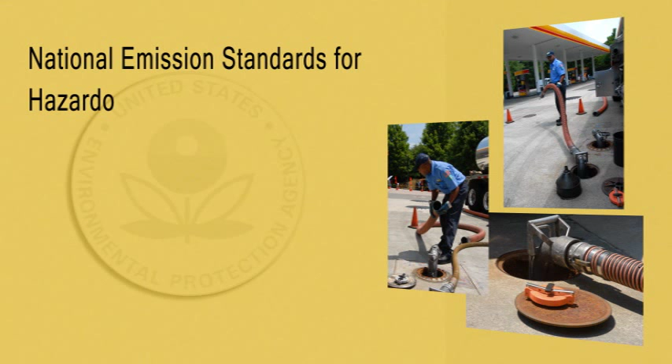The standard is required by the Clean Air Act and goes by a rather lengthy name: the National Emission Standards for Hazardous Air Pollutants for Source Category, Gasoline Dispensing Facilities Subpart CCCCCC. For ease, we will refer to it as NESHAP 6C. Please note that this is a federal, not a state rule.

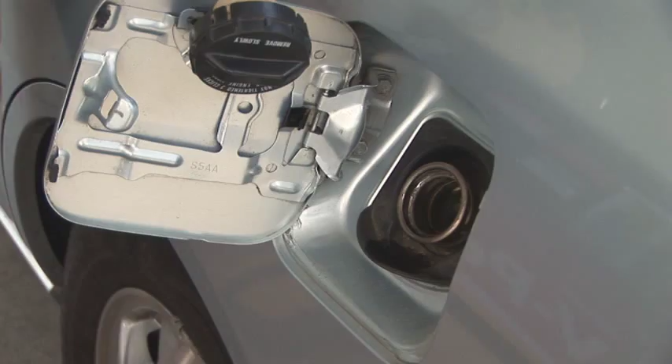Therefore, it applies nationwide. NESHAP 6C focuses on controlling the emission of gasoline vapors during the loading of underground storage tanks. This is often referred to as Stage 1 vapor recovery. The rule does not regulate the emissions of gasoline vapors when vehicles are filled at the gas pump. Capturing vapors at the pump is referred to as Stage 2 vapor recovery.

This federal regulation was last amended on January 24, 2011, and affects all gasoline dispensing facilities in the United States, as well as businesses that own and operate gasoline dispensing equipment for fleet vehicles.

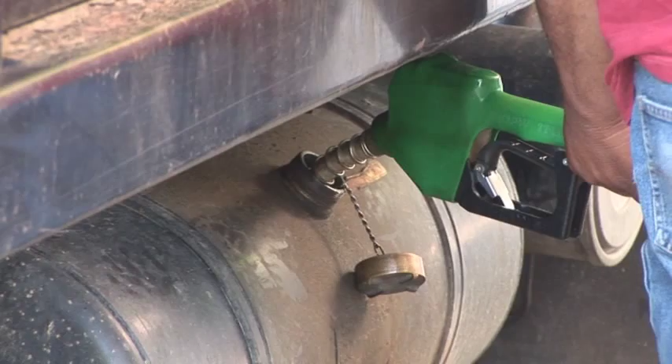A gasoline dispensing facility, or GDF, is defined as any stationary facility dispensing gasoline into the fuel tank of an on- or off-road motor vehicle, lawn and landscaping equipment, boat, test engine, or generator. This definition includes, but is not limited to, retail gasoline stations, as well as commercial gasoline stations and private fleet vehicle refueling centers and marinas. Let's begin with some background information and the need for NESHAP 6C.

EPA is required under the Clean Air Act to identify hazardous air pollutants that pose the greatest health threat in largely populated urban areas. Area sources emit less than 10 tons annually of a single hazardous air pollutant, or less than 25 tons per year of a combination of hazardous air pollutants. Major sources emit more. Gasoline dispensing facilities are one of the area source categories listed by EPA.

Gasoline vapor from these facilities contains hazardous air pollutants that pose a health risk. By installing required controls or vapor balance systems, the amount of hazardous air pollutants released to the atmosphere is reduced by about 2,300 tons annually nationwide.

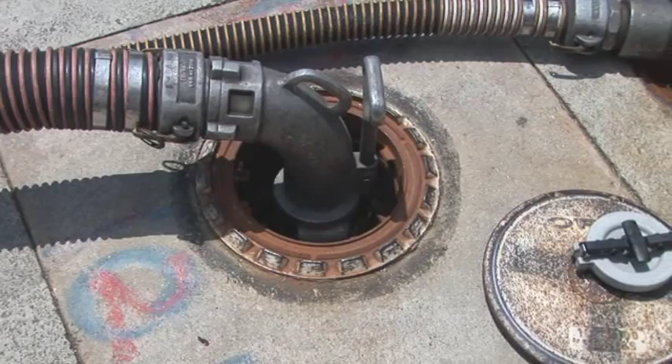The NESHAP 6C rule applies to all existing and new gas dispensing facilities in the United States. The affected sources are both the gasoline tanker truck during delivery of gasoline to a gas station and each gas station's gasoline storage tank. In addition, depending on where the station is located, there may be state and local rules that already require these controls.

Again, the equipment or gas pumps used for refueling motor vehicles, commonly referred to as Stage 2 systems, are not covered under this rule, but are addressed by a separate requirement contained in the 1990 amendments to the Clean Air Act. Now that we have answered who is subject to NESHAP 6C, let's look at the specific requirements. We have divided this into two sections. The first covers general requirements, including best management practices, equipment requirements, record keeping, and reporting. The second section discusses required performance testing.

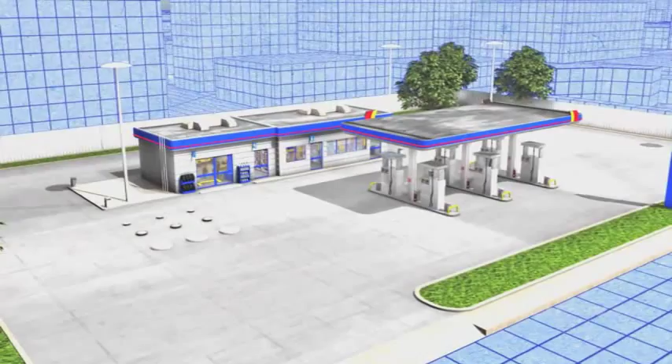Note that record keeping requirements began on January 10, 2011 for existing stations. For new or reconstructed stations, record keeping begins at startup. A new station is a source that began construction after November 9, 2006. There are 3 increasing levels of control depending on your monthly gasoline throughput. In other words, the greater your throughput, the more requirements you must meet.

Monthly throughput is calculated in one of 2 ways: the total amount of gasoline that is loaded during the current day, plus the total volume loaded during the previous 364 days divided by 12 months, or the total amount of gasoline that is dispensed from all gasoline storage tanks at the station during the current day, plus the total volume dispensed from all gasoline storage tanks during the previous 364 days divided by 12 months.

Level 1. Facilities with a monthly throughput of under 10,000 gallons must meet the following Level 1 requirements. All owners or operators are required to minimize evaporation by establishing and maintaining best management practices. This includes minimizing spills. If spills do occur, they must be cleaned up as quickly as possible. Gasoline containers and storage tank fill pipes should be covered with gasketed seals.

Gasoline sent to open collection systems should be kept to a minimum. As for record keeping, you are not required to submit notifications or reports. However, you must have records that document your gasoline throughput and make them available within 24 hours if requested by the applicable authorities.

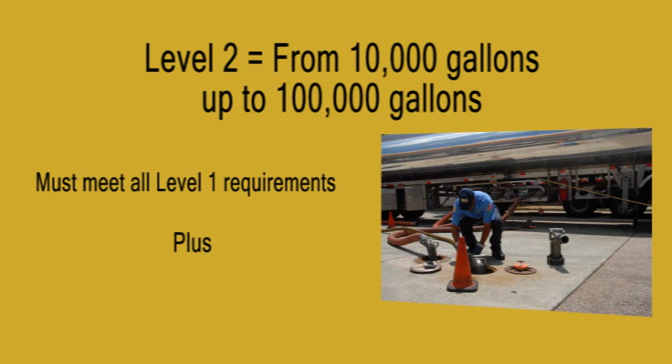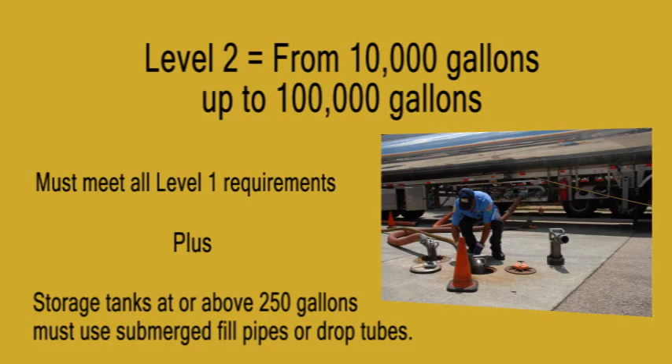Level 2. Facilities with a monthly throughput at or above 10,000 gallons but less than 100,000 gallons must meet all Level 1 requirements, plus the following Level 2 requirements. Storage tanks at or above 250-gallon capacity must be loaded using submerged fill pipes or drop tubes. Submerged filling reduces the release of gasoline vapors by reducing splashing when the gasoline is loaded. With this equipment, less vapors are produced, and the potential for air emission is therefore reduced.

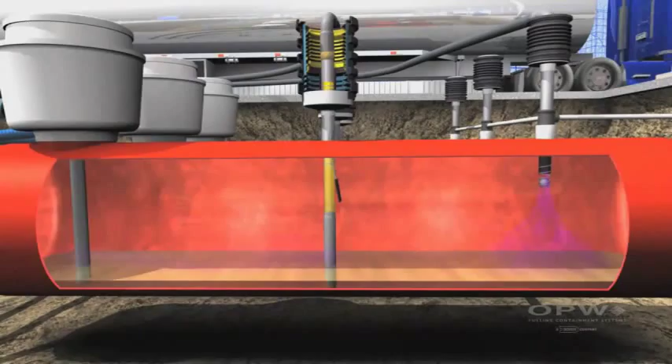Note: storage tanks less than 250-gallon capacity must follow requirements for Level 1. For pipes installed on or before November 9, 2006, fill pipes or drop tubes should extend such that gasoline discharge occurs no more than 12 inches from the bottom of the tank. For pipes installed after November 9, 2006, gasoline discharge should occur no more than 6 inches from the bottom of the tank. Owners must also provide documentation that the gasoline level never falls below the 12 or 6-inch fill pipe discharge point.

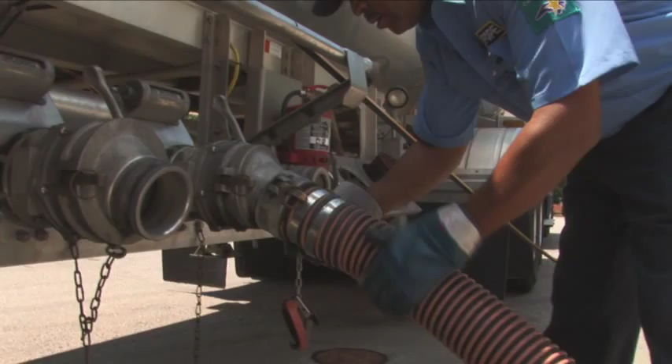Level 2 regulations may require larger facilities to install equipment that will help reduce the amount of vapors generated while gasoline is dropped from the tanker truck into the gasoline dispensing facility storage tank. As for record keeping, you must maintain records that document your gasoline throughput and make them available within 24 hours of request by the applicable authorities. You must also submit the applicable notifications required under Section 63.11124(a) of the rule. We will be discussing this in further detail later in this video.

Level 3. The largest facilities, those with a monthly throughput at or above 100,000 gallons, must meet all Level 1 and 2 requirements we have just discussed, plus operate a vapor balance system. Before we get into the specific criteria options, let's cover what vapor balance equipment does. In the simplest of terms, a vapor balance control system is equipment that reduces the amount of gasoline vapors released when the underground gasoline storage tanks are filled.

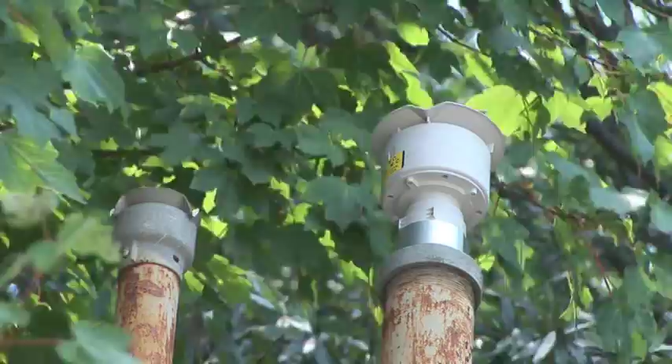Vapor balance equipment consists of a series of hoses and special fittings. Without properly installed equipment, vapors escape through a vent pipe and are released into the atmosphere. However, vapor balance control equipment directs the displaced vapors from the fill tank back into the tanker. The tanker truck drivers then take the vapors back to the terminal where they can be recovered as gasoline. This is known as Stage 1 vapor balance.

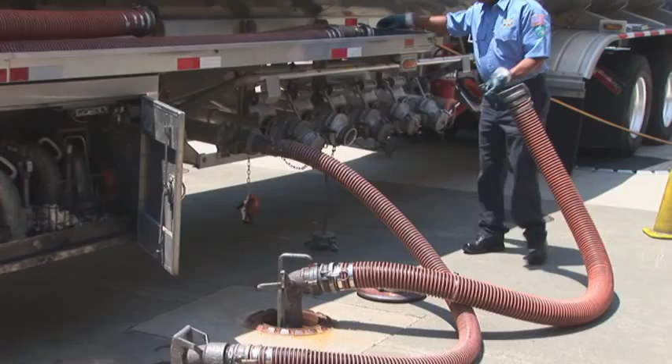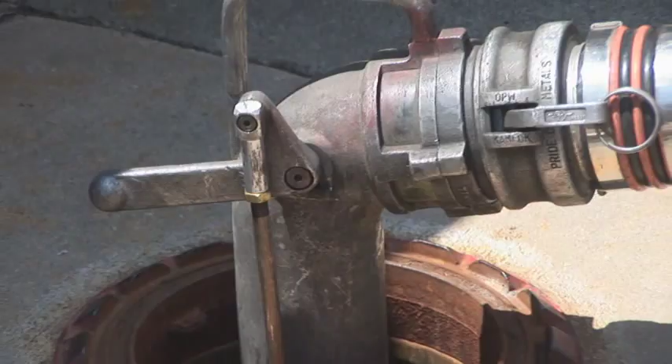The Stage 1 vapor balance system can reduce air pollution, save money by conserving gasoline that would otherwise be lost in the air, and protect public health by reducing the possibility of breathing toxic gasoline vapors. The effectiveness of the vapor recovery program, and ultimately the quality of the air, depends on correct use and functioning of the Stage 1 gasoline vapor balance system.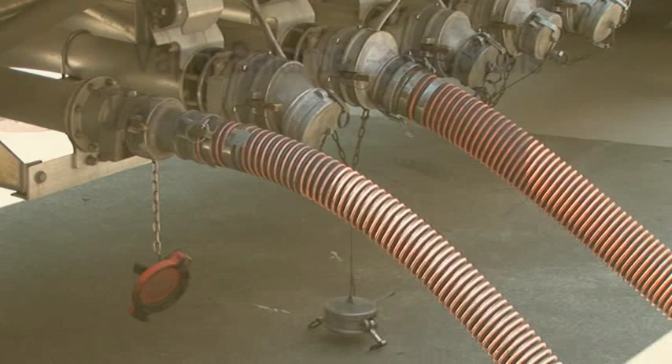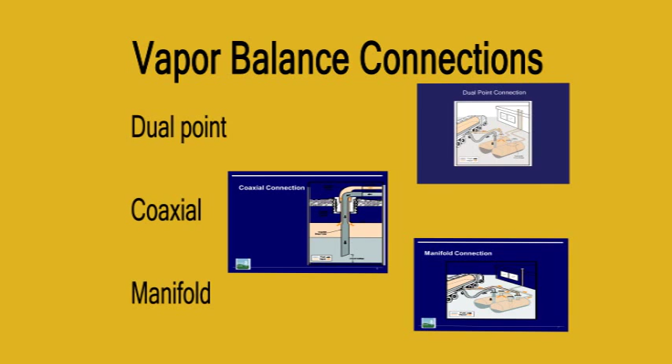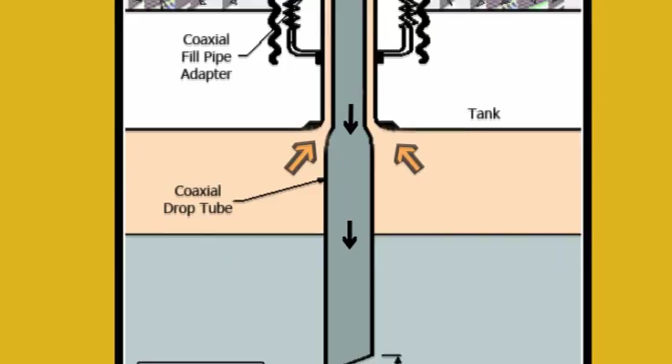There are 3 different connections that are possible between the storage tank and the tanker. Vapor balance connections can be either a dual point, coaxial, or a manifold connection. A dual point connection uses 2 separate tank openings, usually a few feet away from each other. One opening is for fuel delivery into the tank, and one opening for the vapor transfer back to the tanker truck. A coaxial connection uses a drop tube with a narrow top section to create a vapor pathway between the drop tube and the fill pipe. A special coaxial delivery elbow must be used to complete the fuel and vapor pathways to the tanker truck.

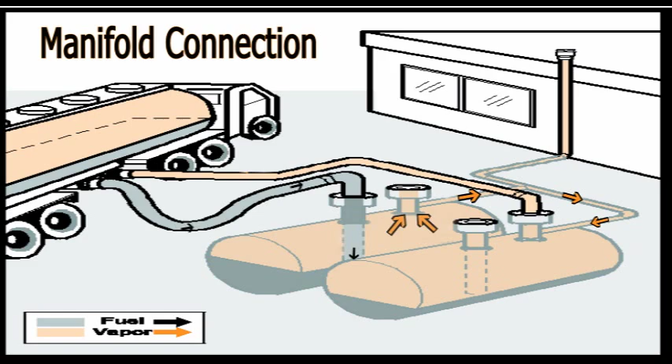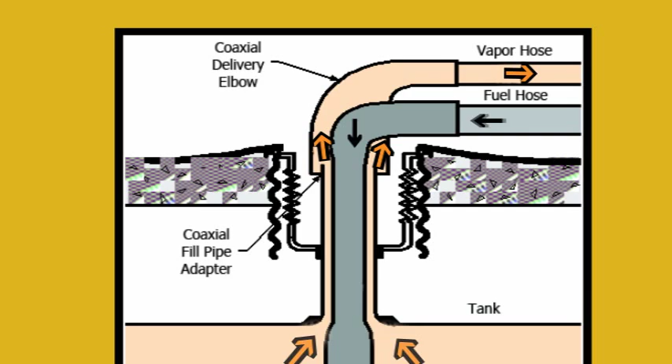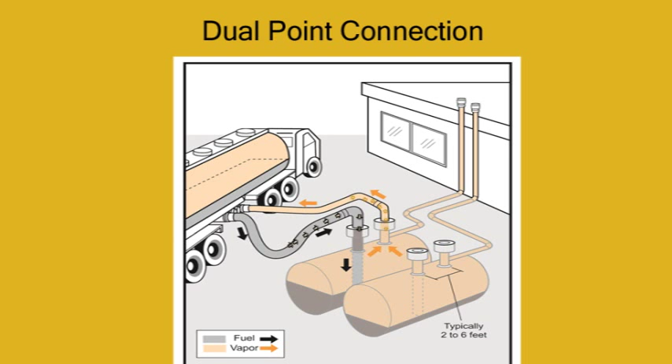In a manifold connection, the vent pipes of the tanks are connected. This allows for more than one underground storage tank to be filled at a time, and the vapors to be transferred back to the tanker truck through one pipe. The NESHAP 6C rule requires all gasoline dispensing facility tanks installed after November 9, 2006 have dual point connections. Those GDF tanks installed on or before November 9, 2006 can have either a dual point, coaxial, or manifold connection. Coaxial connections have been shown to release more gasoline vapors during loading than a dual point connection, and therefore the NESHAP 6C rule requires all newer or reconstructed GDF tanks have dual point connections. Now that we have reviewed what a vapor balance system does, let's look at the conditions under which they must be used.

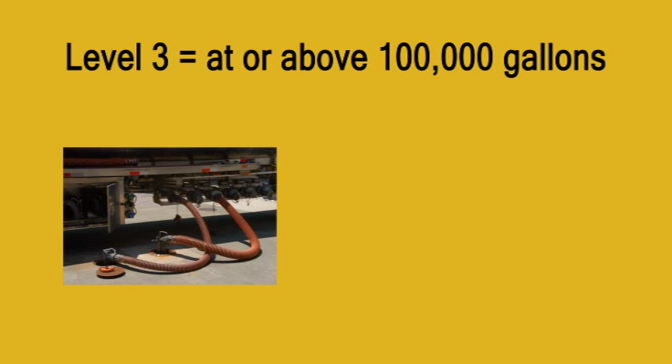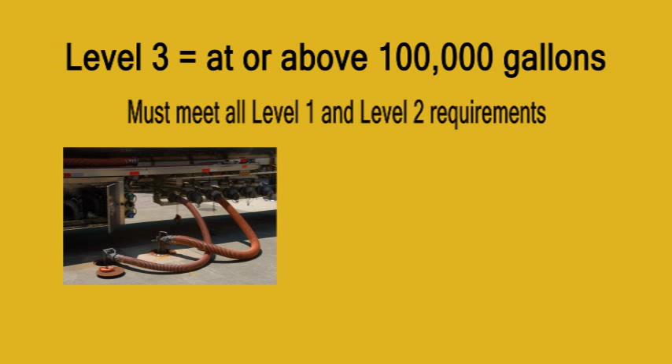If your monthly throughput is equal to or greater than 100,000 gallons, you must operate a vapor balance system and meet Level 1 and Level 2 requirements discussed earlier. Additionally, you must meet one of the following Level 3 conditions.

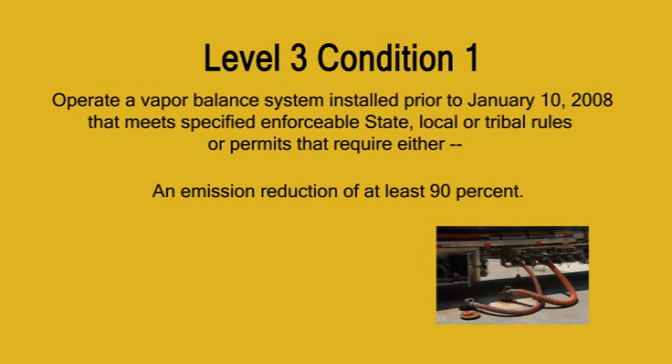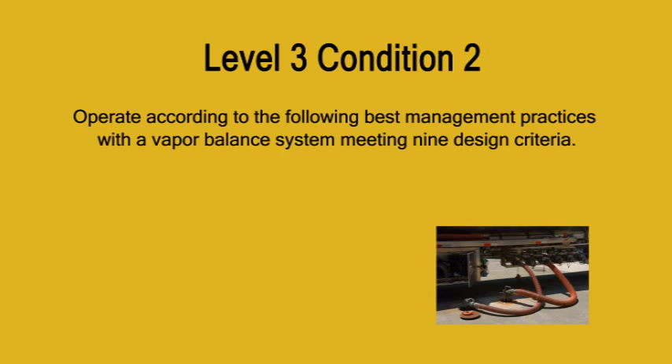Level 3 Condition 1. Operate a vapor balance system installed prior to January 10, 2008 that meets specified enforceable state, local, or tribal rules or permits that require an emission reduction of at least 90%, or Level 3 Condition 2. Operate according to the following best management practices with a vapor balance system meeting 9 design criteria.

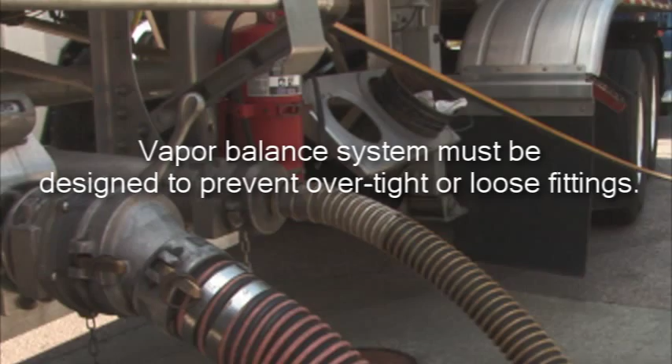Number 1. Connections and lines should be equipped with sealed closures. Number 2. Vapor line from the tanker truck to the storage tanks must be tight, no losses. Number 3. Tanker truck tank pressure must not exceed 18 inches of water pressure or 5.9 inches of water vacuum during the product transfer. Number 4. Vapor balance system must be designed to prevent over-tight or loose fittings.

Number 5. The opening on the top of the tank used to measure the amount of product in the tank, also known as the gauge well, must be equipped with a submerged drop tube extending the specified 12 or 6-inch distance from the tank bottom. This applies to storage tanks at or above 250-gallon capacity. The important thing to note is the GDF owner must prove that the fill tube was always submerged in the product while it was being transferred into the tank.

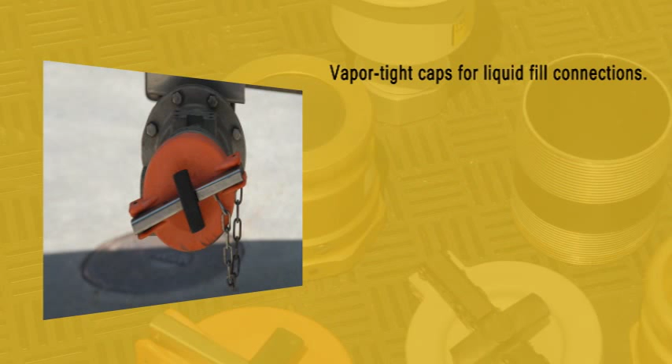Number 6. Vapor-tight caps for liquid fill connections. Number 7. Pressure vacuum vent valves on tank vent pipes at specified setting. This should be tested initially or at installation, and again every 3 years. Number 8. Vapor balance system must initially meet static pressure test, and again every 3 years.

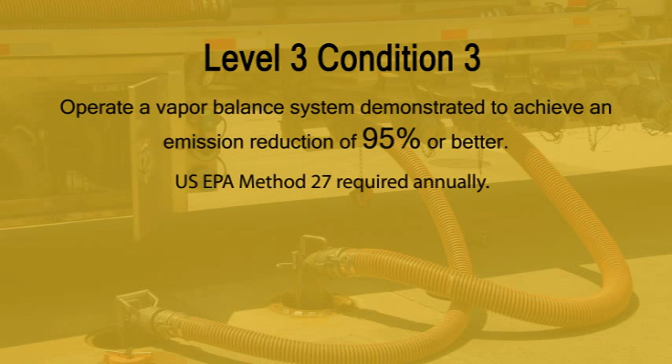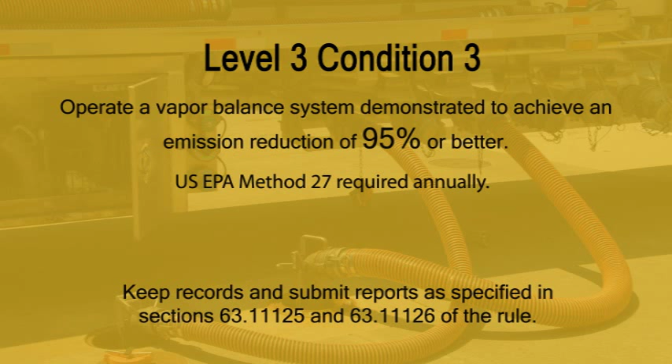Number 9. Dual point vapor balance systems are required for new and reconstructed gasoline dispensing facilities or tanks, or Level 3 Condition 3. Under this option, you must operate a vapor balance system demonstrated to achieve an emission reduction of 95% or better. To ensure vapor tightness of the tanker trucks, U.S. EPA Method 27 is required annually. Keep records and submit reports as specified in Sections 63.11125 and 63.11126 of the rule.

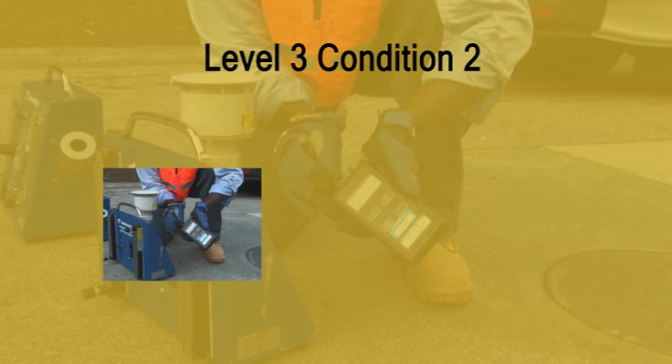Now it's time to discuss performance testing and the requirements for each of the 3 Level 3 conditions. There are no testing requirements for GDFs complying with Level 3 Condition 1. These GDFs are subject to comply with state vapor balance requirements prior to January 10, 2008. For Level 3 Condition 2, you are required to perform the following 2 performance tests. The first is the California Air Resources Board, or CARB Test Procedure 201.1E, and is required for every state, even if you aren't located in California.

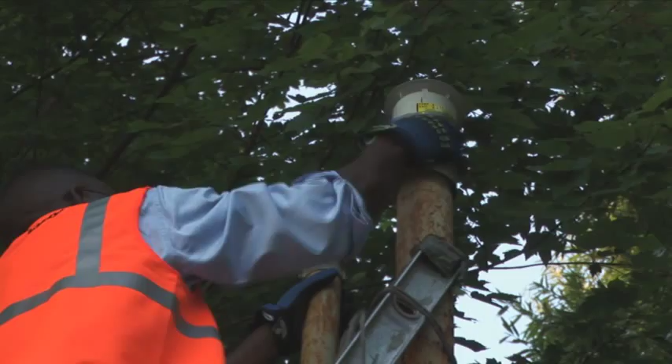This test is used to determine the leak rate and cracking pressure of the pressure vacuum vent valves installed on the gasoline storage tank vent pipes. The second test is CARB Test Procedure 201.3, which is a static pressure test of the vapor balance system. If you choose Level 3 Condition 3, then you are required to perform 3 performance tests. The first test, CARB Test Procedure 201.1, demonstrates that the vapor balance system being used actually achieves a 95% emission reduction rate. The second and third tests are the 2 mentioned earlier.

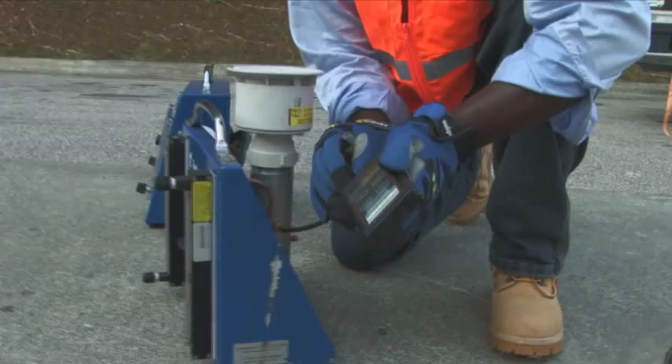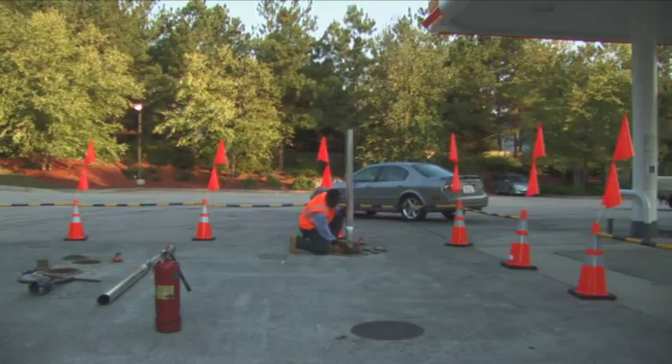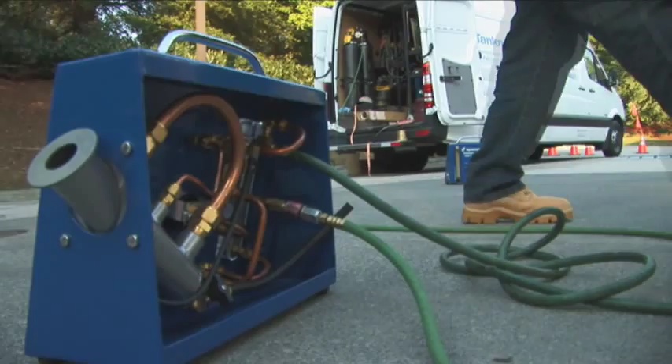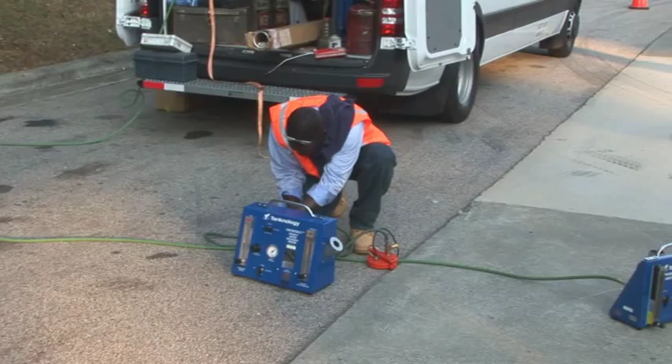The CARB Test Procedure 201.1E for leak rate and cracking pressure on the PV vent valves, and the CARB Test Procedure 201.3, which tests static pressure on the tank. All tests must be performed initially and every 3 years thereafter. For existing GDFs, the initial tests should have been completed by July 9, 2011, if the vapor balance system was installed on or before December 15, 2009. If the vapor balance system was installed after December 15, 2009, testing was required upon installation.

For new GDFs, the initial tests must be completed upon installation of the vapor balance system, and again every 3 years. You are also required to notify EPA of all performance testing at least 60 days prior to conducting and submitting the test results.

If you have a new or reconstructed gas station, you must be in compliance with the NESHAP 6C rule immediately upon completion of construction. If the monthly throughput of your GDF has changed your status, requiring you to meet a higher level of control, you must comply no later than 3 years after you become subject to the rule. Finally, if your existing gas dispensing facility is subject to the rule only because it loads gasoline into fuel tanks other than those of motor vehicles, you must comply by January 24, 2014.

NESHAP 6C requires you to submit an initial notification form to EPA that simply identifies who you are and that you are subject to the NESHAP 6C rule. Once you are required to be in compliance with the rule, you will need to provide EPA the notification of

compliance status. New sources constructed since November 9, 2006 must have met the NESHAP 6C rule requirements by January 10, 2008 or upon startup if startup occurs after that date. Existing sources had until January 10, 2011 to meet the NESHAP 6C rule requirements. The required forms can be found by contacting the Department of Environmental Protection for your state.

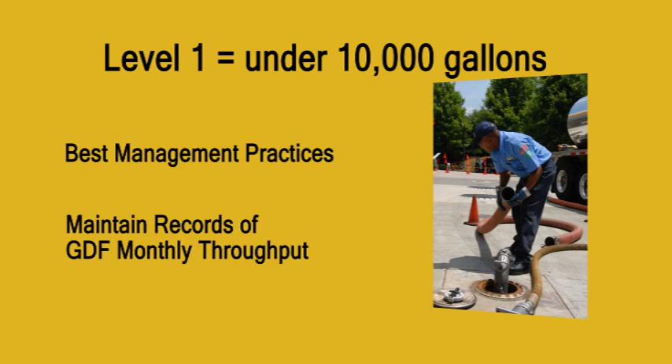If your monthly throughput is less than 10,000 gallons, then the requirements are simple. You must meet Level 1 conditions, which are general best management practices, and you must maintain records of your GDF's monthly throughput. If your monthly throughput is 10,000 gallons or more and less than 100,000 gallons, then you must meet both Level 1 and Level 2 requirements. This includes general best management practices and utilizes submerged filling when loading tanks over 250 gallons. You must also maintain records of your GDF's monthly throughput.

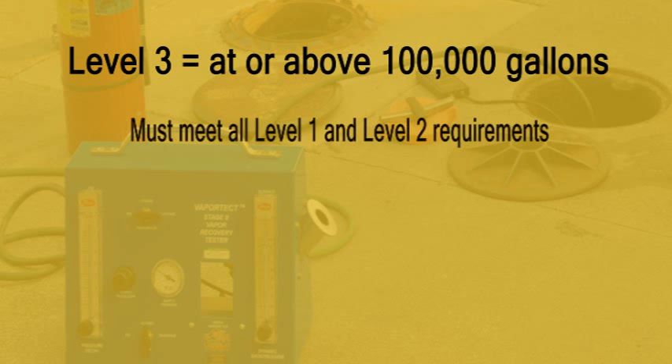And finally, if your monthly throughput is 100,000 gallons or more, you have a number of requirements. As of January 10, 2011, you must meet conditions of both Levels 1 and 2 and have a vapor balance system that meets either Level 3 Condition 1, 2, or 3 when the gasoline tanks are filled. You must also submit your notification of compliance status to EPA, conduct your performance testing, and begin keeping records of your testing. For existing GDFs, performance testing was due by January 10, 2011. By July 10, 2011, testing reports were to be submitted to EPA.

Additionally, for existing sources, the compliance deadlines are: May 9th of 2008, submit your initial notification form. If you missed this date, you still need to submit this form to EPA. January 10th of 2011 to be in compliance with best management practices. You must meet the submerged filling and vapor balance system requirements. September 7th of 2011, EPA must receive your notification of compliance status.

January 5th of 2012, or within 180 days of completing your performance testing, you must submit your reporting information to EPA. If you have missed these dates, you still need to conduct the tests required by the NESHAP 6C rule and file the notifications of compliance status with EPA.